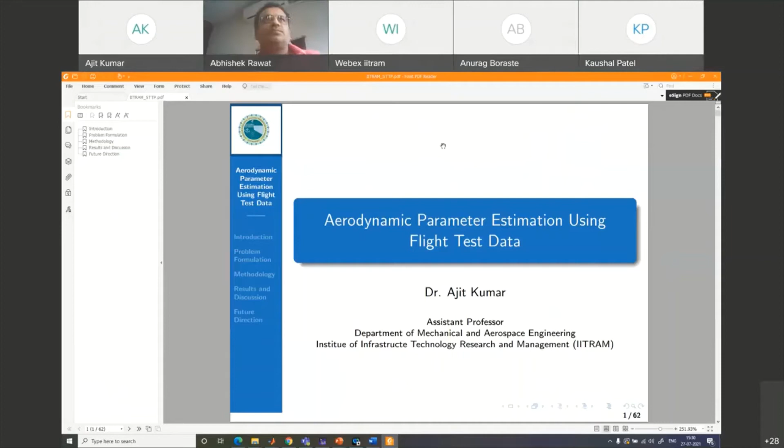Thank you. So the topic for this session's presentation is aerodynamic parameter estimation using flight test data. In this presentation, I would be talking about the introduction part, what this problem is about, what is aerodynamic parameter estimation using flight test data. Then we will also talk about problem formulation, and once we formulate the problem, I'll discuss the methods to solve this problem of parameter estimation. Then we will discuss the results followed by future directions of this work.

Before I start the work, I would like to introduce the term estimation here, parameter estimation. So let us try to understand what parameter estimation is about and where it fits in system theory. We all know in system theory we have three different components, well known as control system, simulation, and identification. These three concepts deal with three entities, which you can see on the screen: input, output, and the system. So whatever we are saying about control, simulation, and identification will be related to these three entities.

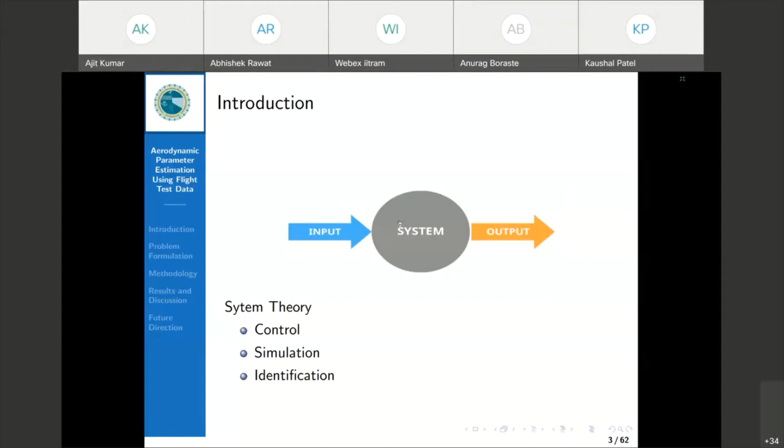The third thing is quite interesting. Sometimes what happens is we know the input data, we also know the output data from the system, but we are not sure about the mathematical behavior of the system, or what the system is about. So when we have these two datasets, input dataset and output dataset, the problem falls under the category of identification. So this was the quick introduction on identification.

Now, parameter estimation. Parameter estimation is a subset of system identification, and as I said, system identification is a determination of mathematical model from observed input and output dataset. In this example, you can see we have an aircraft which is essentially Hansa 3 from the Flight Laboratory, IIT Kanpur. This is just for reference - I have put input data and output data. So input variables contain alpha, which is your angle of attack, pitch rate, normalized pitch rate, and elevator angle. For output, I kept CL and CM, which is your lift coefficient and pitching moment coefficient.

So just to give an interpretation, we have these two datasets, and we want to find the behavior of this aircraft, precisely the behavior of the longitudinal dynamics of the aircraft. This is known as system identification. And when the model is structured in terms of parameters, finding those parameters will be a problem of parameter estimation.

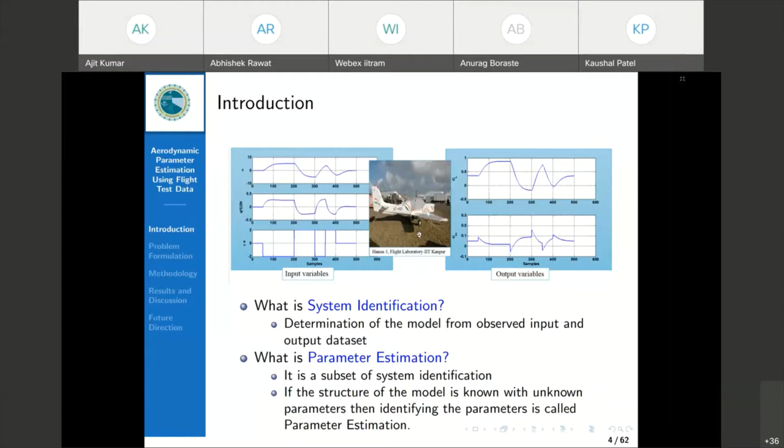Now coming to what is aerodynamic modeling and parameters. As I said in the title, it is about finding aerodynamic parameters. As we know, in a very standard representation of aircraft in 6 degrees of freedom, we have seen terms appearing in the equations like CL, CD, CM. I will also elaborate in subsequent slides. So just to give you the introduction, CL is lift force coefficient, CD is your drag force coefficient, and CM is your pitching moment coefficient.

And in the lateral directional part, we have CL, CY, and CN. They are functions of side slip angle, aileron, rudder, P and R, so they also have the standard meaning. For example, CY is your side force coefficient, rolling moment coefficient, and CN is your yawing moment coefficient. We will see in detail, just to give you the introduction, what we refer to when I say aerodynamic parameters.

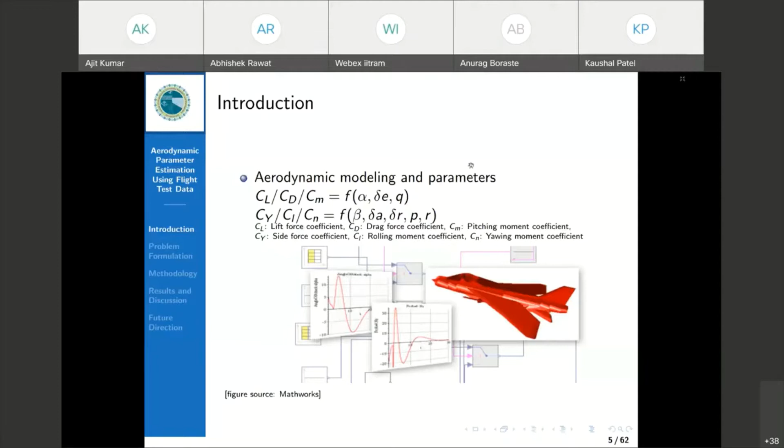Now, after introducing, we also want to know why parameter estimation is required, why we are going for aerodynamic modeling and parameter estimation. These are the motivations of this work: we always have a need and quest for better understanding of aircraft, which can be manned or unmanned, fixed wing, rotor wing, or multi-rotor. Any aerial vehicle can come in this category.

We also know the importance of deriving flight dynamic models, because it helps in investigation of system performance and stability characteristics. It helps in finding high fidelity, high bandwidth models for in-flight simulators. It helps in designing a good flight control system. It also helps in doing analysis on handling quality compliance.

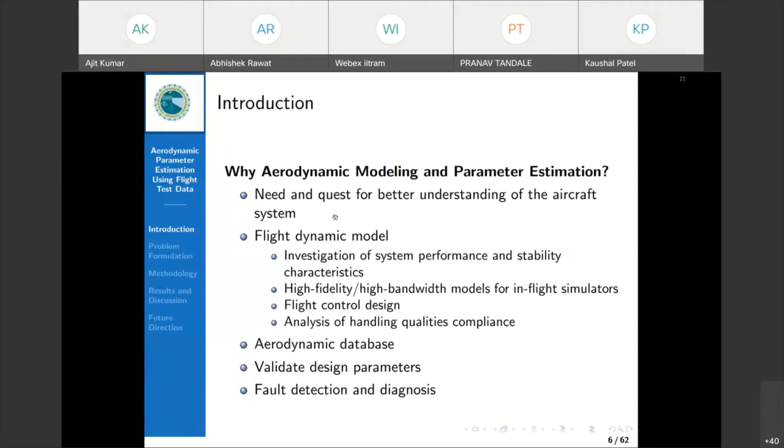Apart from these advantages, we also have an advantage of finding an aerodynamic database with the help of aerodynamic parameters, and we validate design parameters, for example wind tunnel parameters, using these parameters. It's also useful in finding fault and diagnosis, of course. So these are the motivations of doing parameter estimation related work.

Now coming to problem formulation, how exactly we formulate this problem. As I said earlier, we have a standard representation of aircraft dynamics, and generally we assume that the dynamics in two parts are decoupled: longitudinal dynamics and lateral directional dynamics.

So the equations for longitudinal dynamics are here, and the variables appearing on the screen are V, alpha, theta, and Q. V, standard representation, is airspeed, alpha is your angle of attack, theta is your Euler angle or pitch angle, and Q is your pitch rate.

I have highlighted these three terms, as you can see: CD, CL, and CM. They are your force and moment coefficients. For example, CD is your drag force coefficient, CL is your lift force coefficient, and CM is your pitching moment coefficient. I'm sure you will know the physical representation and understanding of these force and moment coefficients.

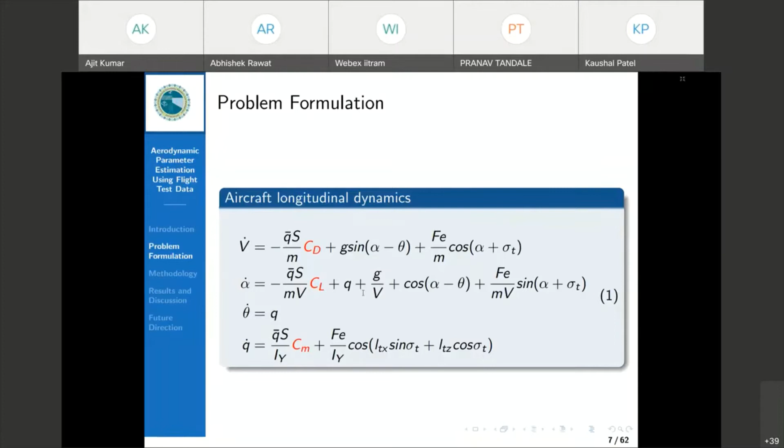And other terms also have the standard representation, so it's written here. For example, Q is your pitch rate, wing area, mass, angle of attack, pitch angle, inclination angle of engines, thrust, dynamic pressure, elevator deflection, wing chord, moment of inertia, and density of air.

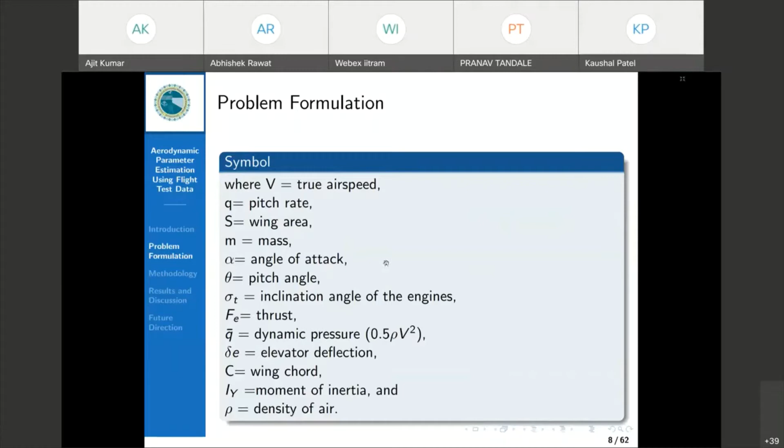Similarly, when showing you these coefficients CD, CL, and CM, we have assumptions that they vary linearly with respect to angle of attack, elevator, and pitch rate. CD, of course, will not have much effect from pitch rate, so this model is simply dependent on alpha and delta E. So this is also a linear representation.

We assume that our flight test data has been gathered in the linear regime. When I say linear regime, it means your alpha should be low, essentially lower than 5 degrees, or it should be in between 2 to 3 degrees. So when the aircraft is flying at a lower angle of attack, this model is still valid. So we are taking here a linear model for CD, CL, and CM.

So now, as you can see, CD equals CD naught plus CD alpha plus CD delta E. And terms in CL: CL naught, CL alpha, CL delta E, and CLQ. And terms in CM: CM naught, CM alpha, CM delta E, and CMQ. They are essentially known as aerodynamic parameters.

These parameters also play a very important role in characterizing the aircraft, as I said, so they have to do with the stability and control analysis of the aircraft. For example, when we have the number CM alpha, we can comment on the stability of the aircraft. When we have the number, let's say CM delta E, we can comment on the controllability of the aircraft.

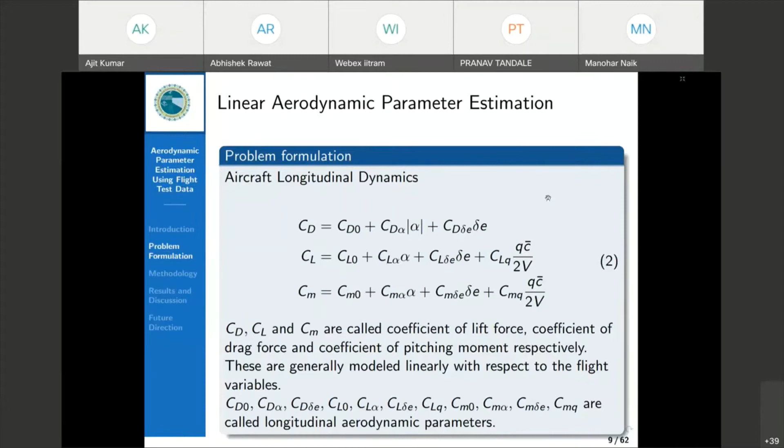So the variable or parameter related to your elevator or control surface helps in characterizing control aspects of the flight vehicle, and other parameters like CL alpha, CD alpha, CM alpha talk about the stability performance of the aircraft. We will learn these things throughout the present slides.

Similarly, as I discussed about longitudinal dynamics, we have lateral and directional dynamics, in which the state variables are beta, which is your side slip angle, P dot and roll rate, where P is essentially roll rate and P dot will be the rate of that, and R is your yaw rate, along with the Euler angles phi and psi.

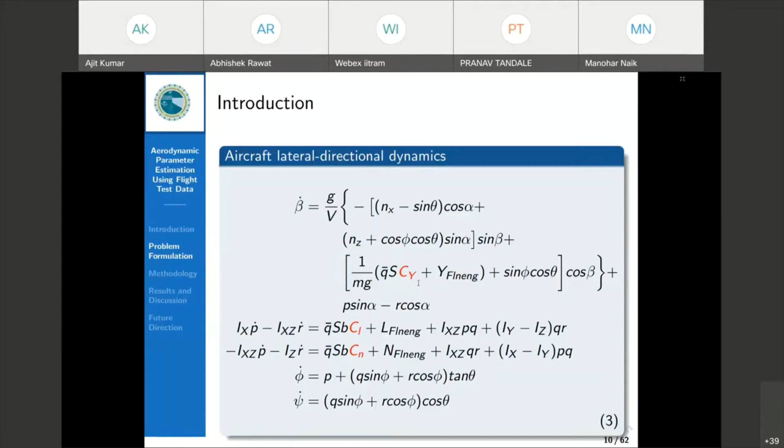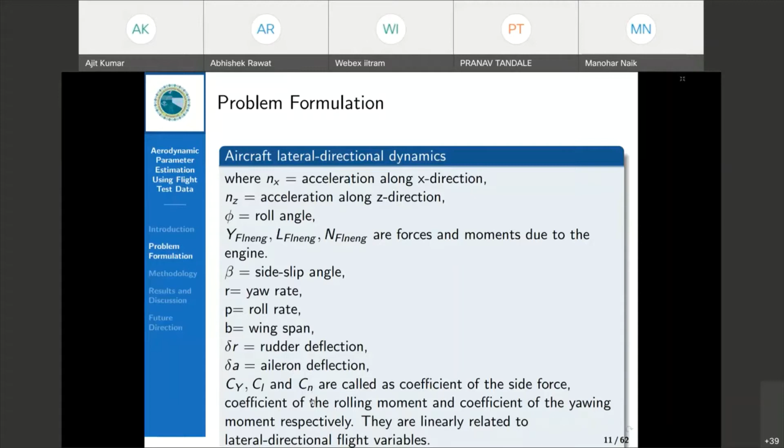Okay, and in these equations also you can see the variables appearing like Cy, Cl, and Cn. They represent lateral directional force and moments. Nx is acceleration along x direction, Nz is acceleration along z direction, phi is your roll angle, and y, f, l, e, g are engine parameters, beta is your side slip angle, r is your yaw rate, p is roll rate, b is wingspan, and delta r, delta a are control surface deflections, rudder and aileron deflection. So Cy, Cl, and Cn are called the side force coefficient, rolling moment coefficient, and yawing moment coefficient.

So again, we assume that the relationship between force and moment parameters are linear with respect to flight variables like beta, r, p, delta r, and delta a. That's why we got again a linear equation. So now the problem for lateral directional dynamics could be finding these parameters: Cy naught, Cy beta, Cy r, Cy p, Cy delta r, Cy delta a, etc. Similarly for Cl and Cn.

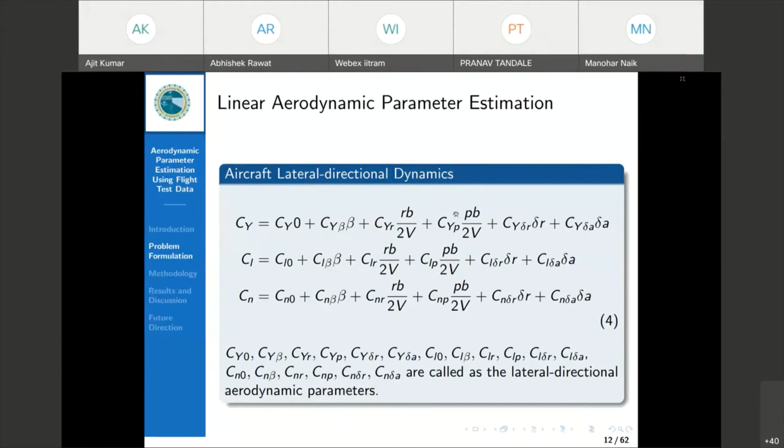So I hope now we are clear with the problem formulation part. Now immediately these questions will come to mind: when we have described the problem, and we know the problem formulation of the system, then how to solve them, how to find these aerodynamic parameters. So we have different approaches to solve this problem.

First one is the analytical method. Under this method, when we have the details about the aircraft, meaning we know the geometry of the aircraft, then we can get a first cut idea on aerodynamic parameters. So this is one of the simplest and required methods to do this analysis.

And the second one is the wind tunnel test method, which is also quite popular. In this, usually we scale down the aircraft, whatever aircraft it is. Suppose it's an unmanned aerial vehicle of small size, then we can put a full scale model. And after inserting it inside the wind tunnel, we can derive the aerodynamic parameters. So this is the second approach by which we can get aerodynamic parameters using wind tunnel testing.

And the third one is flight test data. In this method, we have to fly the craft or the UAV if we have one, and then we have to gather the data, and then we can do parameter estimation.

So why these three different methods? Because as we know, the analytical method is one of the simplest, but it has a lot of constraints since we have many assumptions in finding the parameters. So it's not very well suited when we go for design of control systems and simulators, but it gives you the first cut idea on the aerodynamic parameters. It will not be very accurate because of its constraints.

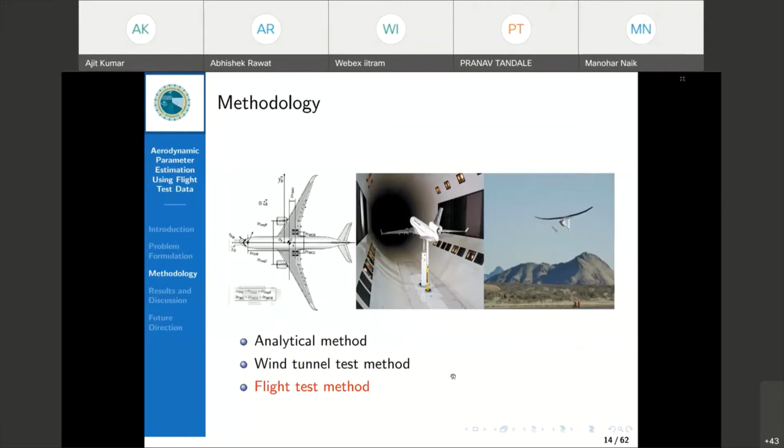Okay, now after choosing this, what are the methods actually to follow? In the last 6 to 7 decades, we have an enormous amount of work in this direction. We have lots of methods in frequency domain, time domain, traditional approaches, and also novel methods like machine learning based parameter estimation and data driven methods.

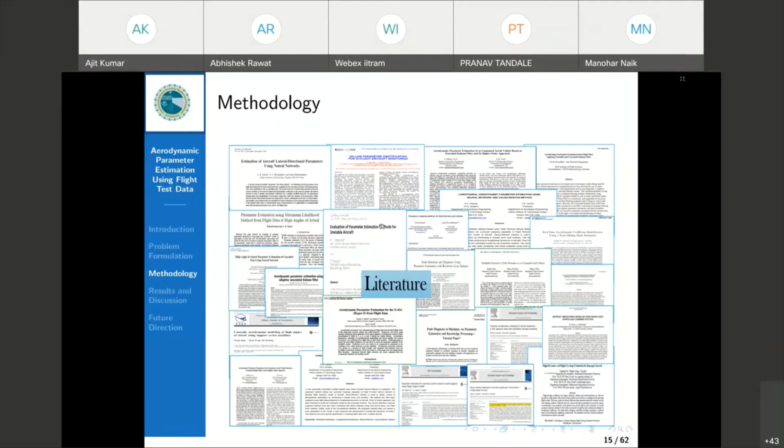So as I said, we have methods in time domain and frequency domain. It's very hard actually to decide which domain to focus on at the initial stage. So I personally give weightage to both domains, as discussed by experts in those fields. The comment by Turkey and Ulsoy in 1998: they say the results show the superiority of frequency domain parameter estimates in the presence of runout noise. However, the frequency domain approach requires an FFT and may be suitable in offline estimation or online estimation of processes with slow dynamics. So this was the comment by Turkey and Ulsoy.

This is Jategaonkar's comment, who exclusively works on time domain. A flight vehicle is a dynamic system, and since a state space representation in the time domain is closer to physical reality than any of the frequency domain transform techniques, time domain methodology is preferred. So this is taking a call for which kind of process we should go for, which method. I would restrict our presentation to time domain for today's discussion.

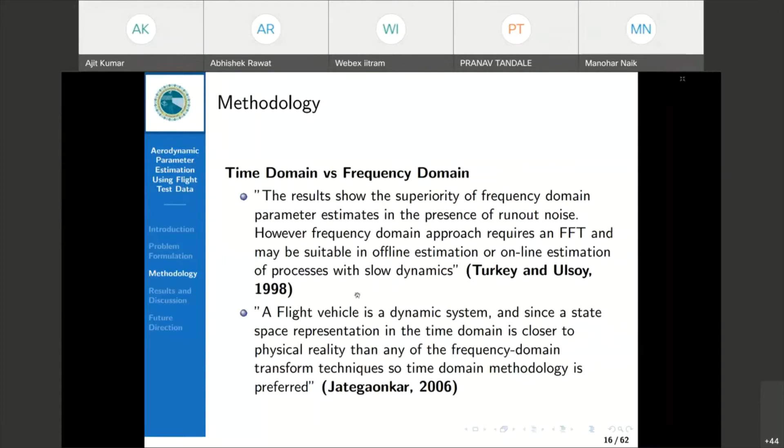In time domain also, as I said earlier, we have methods based on physics-based model and data-driven model. Physics-based model says that the principle derives from basic understanding of the physics. All the parameters associated to this model will have their physical interpretation, and system representation is usually in the form of ordinary differential equation or partial differential equation. So this is your physics-based model approach.

In data-driven model, it's completely a black box kind of approach, that's why it is also known as black box modeling approach. They deal with cause and effect relationship, meaning they only deal with input and output data sets. It's easier to derive, and we do not have the initial requirement of physical understanding of the system. We do not deal with physical equations to work with the data-driven or black box model.

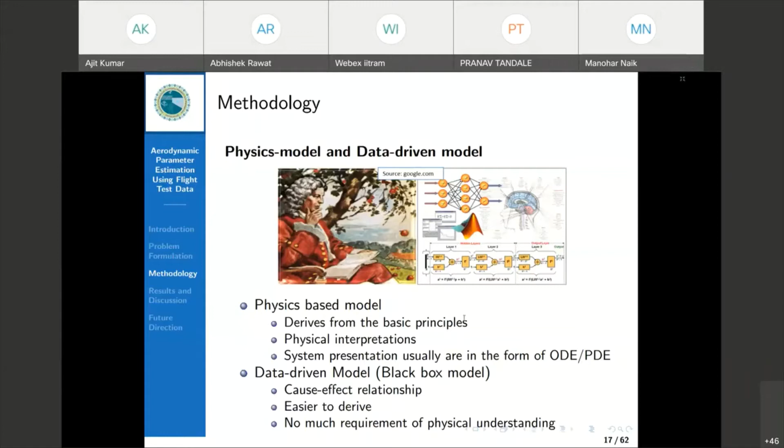Under physics-based model, we have certain standard methods. They are known as equation error method, output error method, and filter error method. We will see them one by one, and then move further.

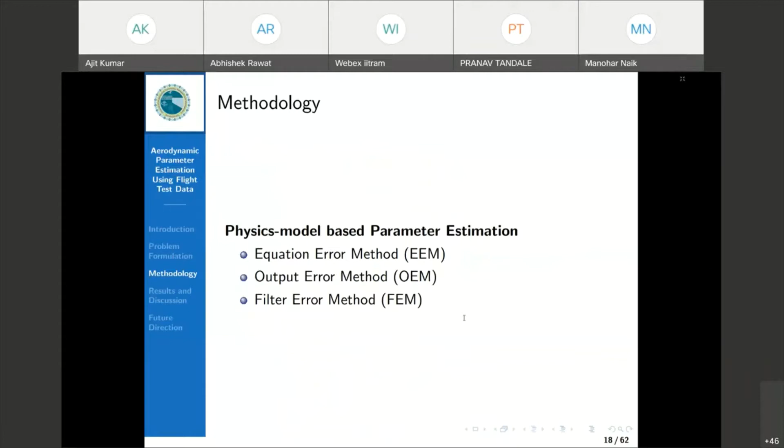Under equation error method, we have a very powerful and preferred approach known as least squares estimation. It is quite a popular approach, I'm sure we are all familiar with it. It is unbiased, efficient, and consistent estimation, and it gives you a one-shot solution. But the drawback is inadequate performance in presence of measurement and process modeling error. When your data is noisy, with noise in measurement and process, it might not perform well.

The second kind of method is output error method, and one example under this category is maximum likelihood estimation based method. It can handle measurement error, and it also deals with optimization schemes, such as Gauss-Newton based optimization, LM optimization, and GA. These are certain optimization routines involved in MLE based estimation. But again, it has inadequate performance in the presence of process noise, meaning it will be able to handle measurement error, but not process noise error.

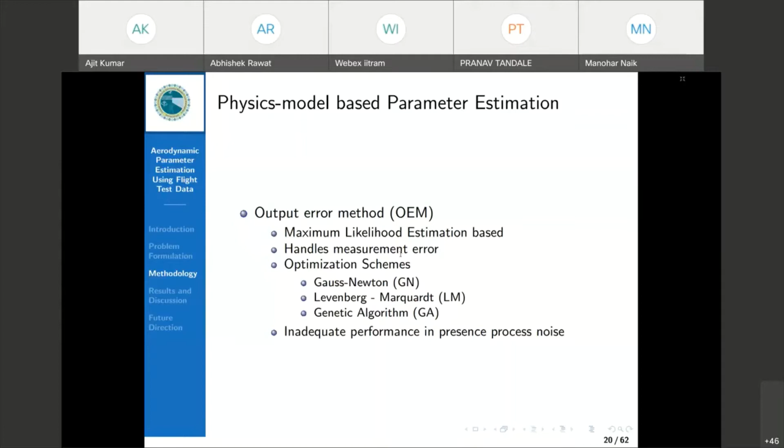The third one under this category is filter error method. It handles both process and measurement noise, and works well with linear and nonlinear models both. It has a relatively faster convergence rate, and is used in unstable aircraft parameter estimation. Under this category, we have quite a popular method based on Kalman filter and its variants, like extended Kalman filter, unscented Kalman filter, and particle filter, etc.

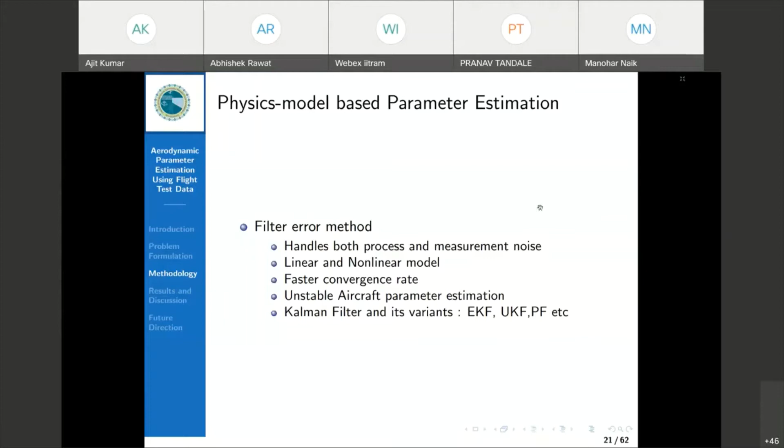These were the methods which fall under the category of physics-based parameter estimation, or physical understanding based parameter estimation method.

Under data-driven model-based parameter estimation, we have three popular methods. Delta method has been one of the most popular methods for the last two decades, but these are not the only methods under this category, because nowadays we have lots of tools under AI and machine learning. So these are the three methods I'll be discussing in this presentation: delta method, and two methods derived from the first one, which are ANFIS-delta and GPR-delta. But apart from these, there are enormous amounts of methods, like fuzzy logic based method, random forest tree based method, and various other types using CNN and deep neural network.

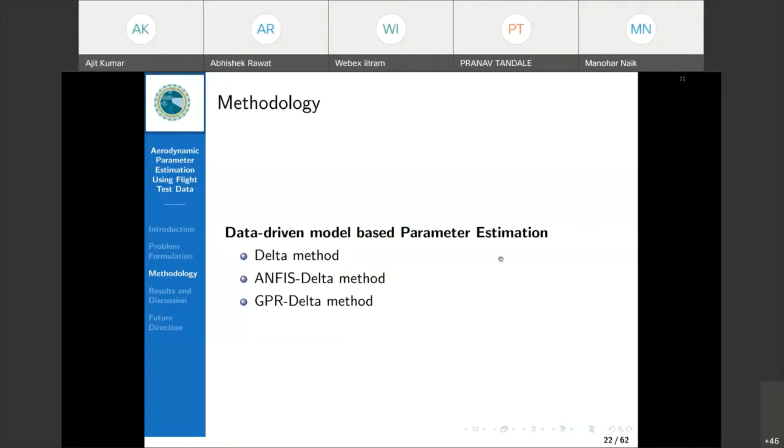Now we will try to see one by one. Throughout this presentation, I'll be talking about these three methods: delta method, ANFIS-delta method, and GPR-delta method. So let's start with the delta method.

The delta method was proposed way back in 1998 by Professor Ghosh, and his supervisor at that time, Professor J.R. Raol, who was also one of the renowned researchers in the domain of aerospace engineering.

The philosophy of delta method deals with the understanding of feed-forward neural network, I'm sure we are familiar with this concept. As you can see in this slide, I have kept the architecture of FFNN, feed-forward neural network, at the corner, which I'm claiming here as a black box model. Under that FFNN, we have three different layers: input layers, hidden layers, and output layers. Our input data deals with input layers, output data deals with output layers.

The heart of this concept is the hidden layer, where we try to capture the complexity of the problem. Based on the complexity of the problem, we choose the number of hidden layers. So judiciously, we can plan for hidden layers and the number of neurons in the hidden layer, and this is the actual concept here, FFNN. Once you have this network model, and you're able to train it on the basis of input and output data, you will get your black box model. This is quite a straightforward process of getting a trained model using FFNN.

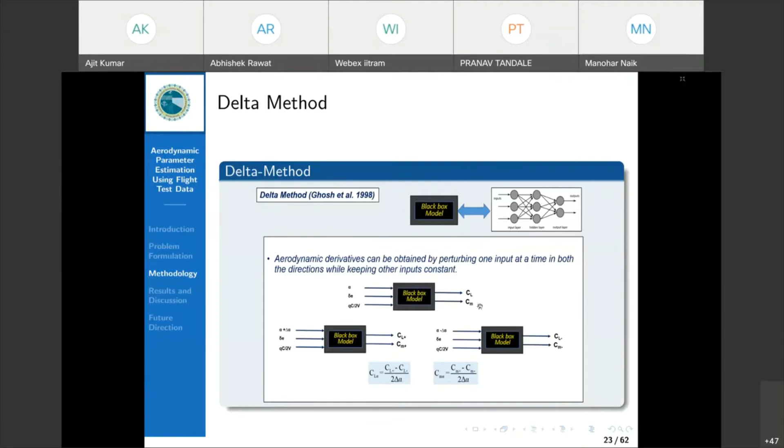But before we see the result, I would also like to discuss two novel methods recently proposed by me and my professor and PhD supervisor, Professor Ajay Kanti Ghosh.

In this approach, we tried to replace the feed-forward neural network with ANFIS, because in ANN, we know it is very good for training but it lacks logic. Fuzzy logic is known for deriving logic from the system, and neural network is good for training the system. So we thought, if we combine both principles, which is a well-known tool nowadays known as neurofuzzy.

We have taken the advantage of neurofuzzy and put it into the delta system or delta philosophy. So ANFIS delta system is essentially a combination of neural network and fuzzy logic understanding, and your feed-forward neural network, which was a 3-layer network, is now getting replaced with a 5-layer ANFIS architecture.

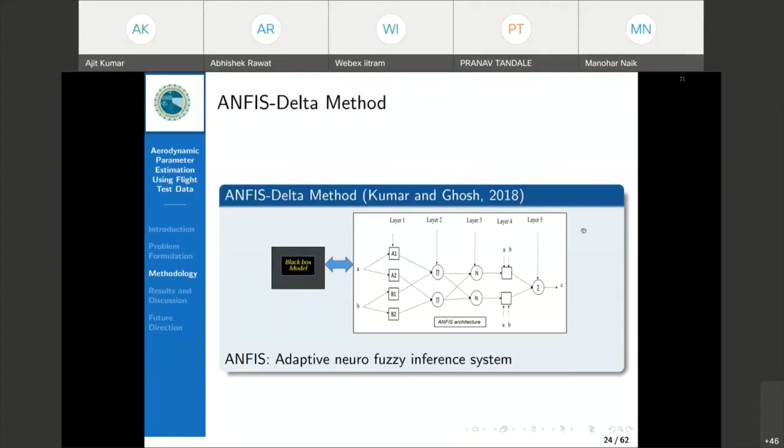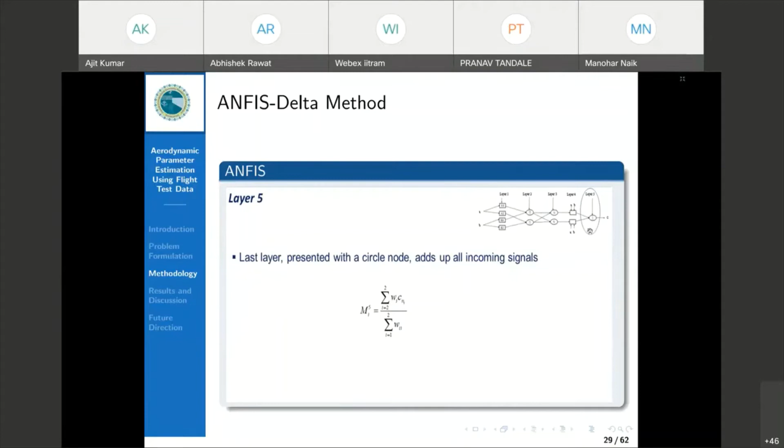Earlier you have seen input layer, output layer, and hidden layer. Here also we have 5 different layers: layer 1, layer 2, layer 3, layer 4, layer 5. Whatever we were trying to do with curve fitting with the help of activation function, now your membership function will get active in this approach. This was the philosophy of ANFIS delta, and another one was the GPR delta method.

So in this approach, we tried to replace the concept of ANN network with GPR understanding, which is your Gaussian process regression model. This works in a stochastic framework, and we do not have to deal with layers.

We will also see some features of Gaussian process regression. It's known as a powerful non-parametric tool for learning regression, coming from supervised learning based on input-output data sets. It's a Bayesian-based approach with a Gaussian probabilistic framework. GPR accommodates asynchronous data sources, periodic data, missing data, and structural data. These are additional advantages of dealing with GPR.

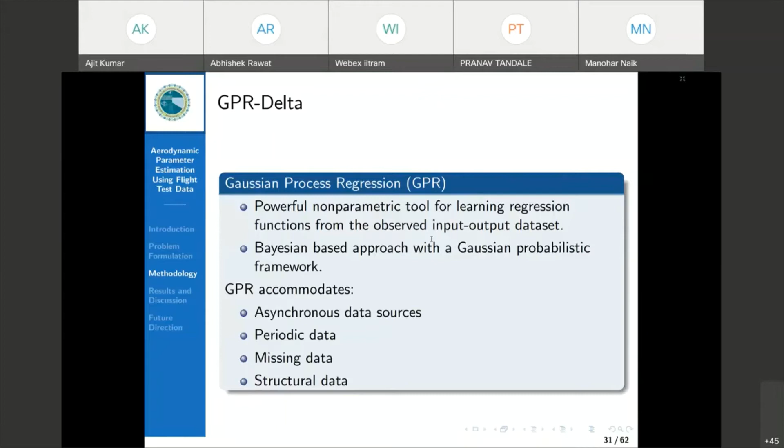Like ANN and ANFIS, we have features by which you try to approximate the nonlinearity or capture the dynamics of the problem. They are covariance or kernel function, which gives a model of data and controls the property of the Gaussian process. Other adjustable parameters are known as hyperparameters. By adjusting these parameters, you are also trying to adjust the performance of the system. So under these two, covariance function and hyperparameters, you will be able to approximate the function.

GPR model can model various different traits and properties of a data set, and simple covariance functions can be combined to create a more complex one. You can also take a multiple combination of covariance functions to derive a GPR function. So this was the understanding of GPR.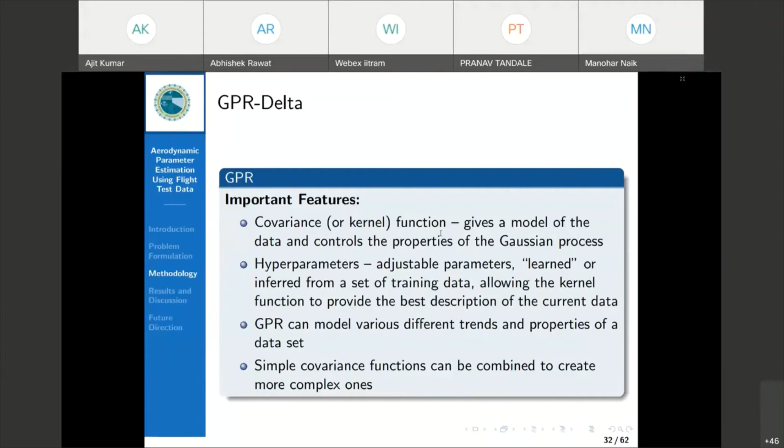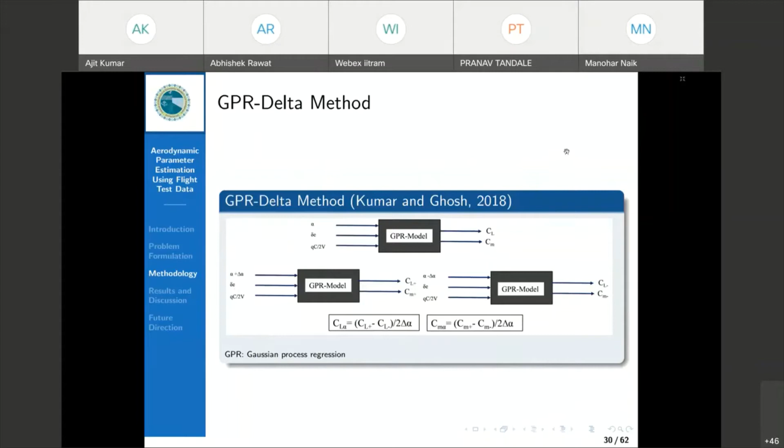Under this understanding, we will apply the philosophy of the delta method. As I said, if your black box is now the GPR model, then you perturb the system in both directions and you will get CL alpha, CM alpha, similarly CM delta E and CL delta E, etc. So after knowing the system, we will discuss the case studies. Now it's time to look at the implementation of these methods which we have discussed.

To demonstrate these three methods, we have taken three case studies of two different aircrafts. The first one is Hansa 3, which is an in-house aircraft at IIT Kanpur flight laboratory. We have demonstrated lateral directional aerodynamic parameter estimation from simulated noise data.

This is just simulated data and we have added noise purposefully. We will see how the aerodynamic performance or parameters come out when we use this data. Second, to demonstrate longitudinal dynamics, we have estimated the longitudinal parameters from Hansa 3 flight test data. Then the third data is independent data taken from DLR.

Reference goes to Dr. Jategaonkar. Under this, we also performed longitudinal parameter estimation just to validate our method with another aircraft.

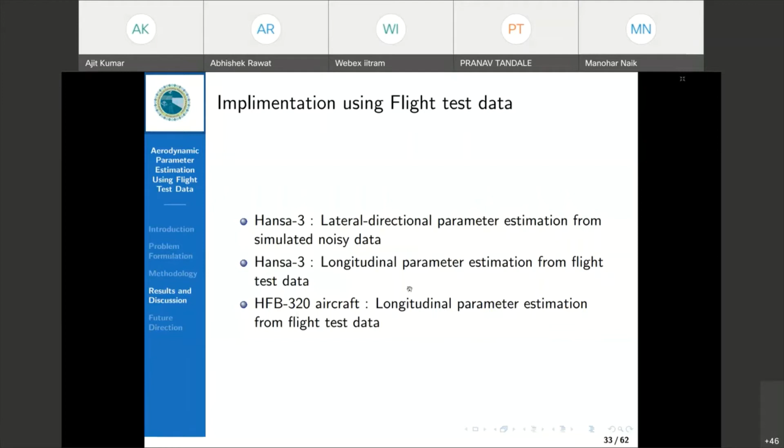These are the technical specifications of the Hansa 3 aircraft. Length is 7.66 meters, wingspan is 10.47 meters, wing area is 12.47 square meters, and it has a maximum takeoff weight of 750 kilograms. Cruise speed is around 213 km per hour, and it has a range of 842 km.

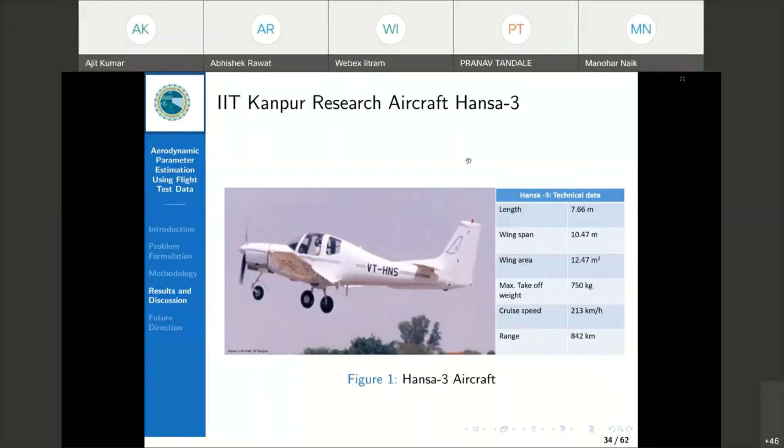To estimate lateral directional parameters, we need to have the flight variables under lateral directional dynamics. We know that under lateral directional dynamics, we have inputs as side slip angle, roll rate P, yaw rate R, aileron deflection delta A, rudder deflection delta R. We also tabbed in force and moment coefficients: side force CY, CL is your rolling moment coefficient, and CN is your yawing moment coefficient.

You can see the data sample is of 45 seconds, essentially a replicate of one data set. In the first segment, we added 1% noise from 0 to 15 seconds. From 15 to 30 seconds, we added 5% noise. And from 30 to 45 seconds, we added 7% random noise. We wanted a bigger data set, and purposefully added noise of different degrees just to see how they respond.

After this training, I'm showing you only the ANFIS estimated results. Similarly, we also had results for ANN and GPR. So for example, let's talk about CY. We have trained our FIS fuzzy inference system using 1%, 5%, and 7% random noise.

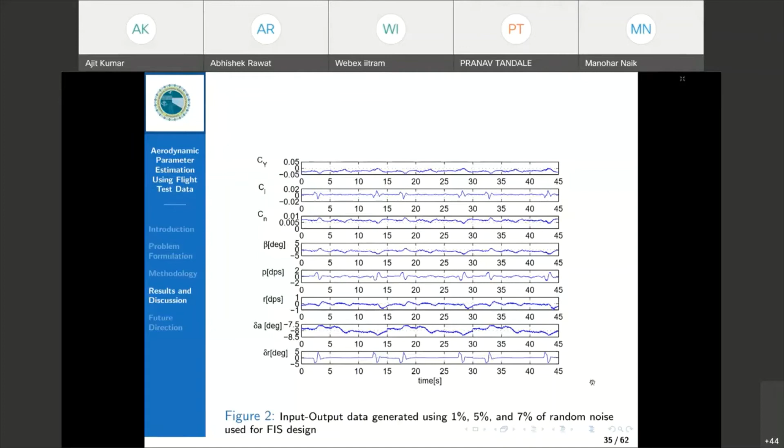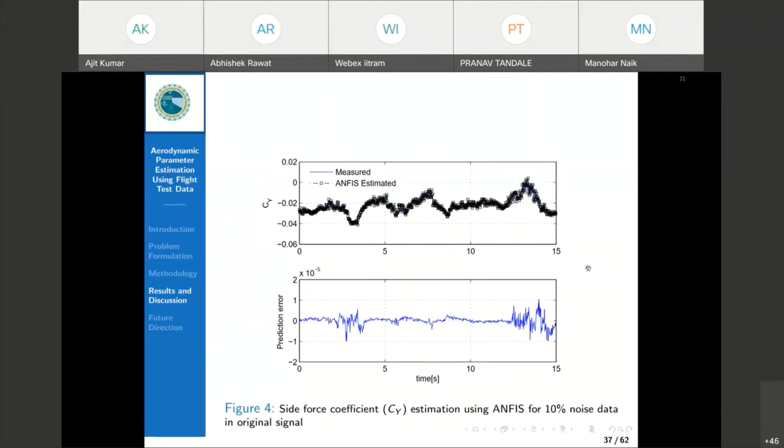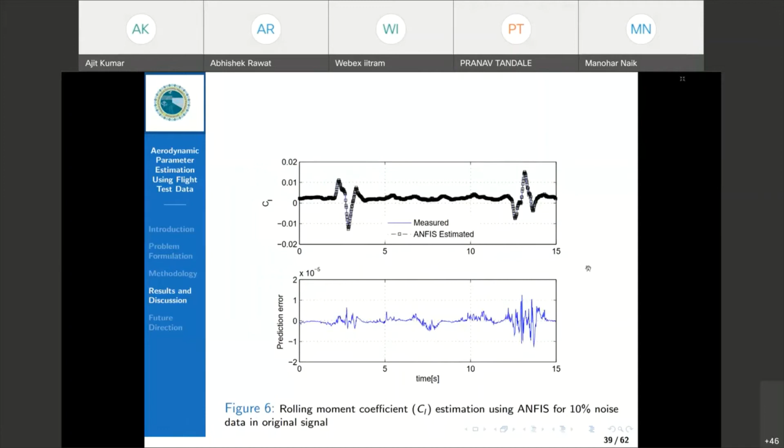Similarly, this exercise was done for rolling moment coefficient CL, and we saw our prediction error in the order of 10 to the power minus 5. This earlier one was for 3%, this is for 10%. And then for yawing moment, prediction error again in the range of 10 to the power minus 6, using 3% noise data and 10% of the noise data.

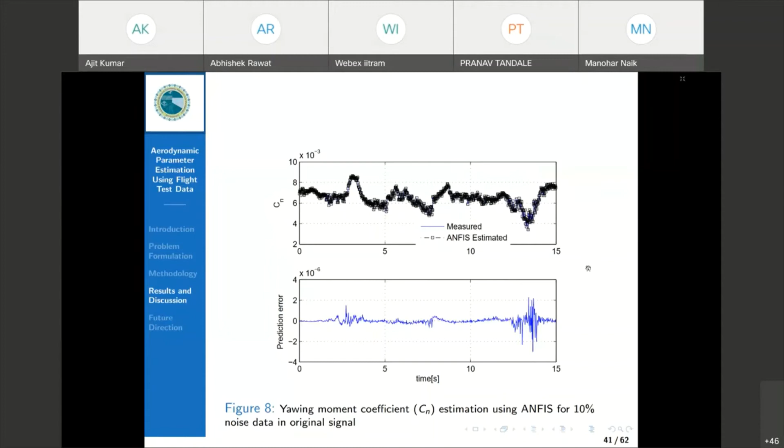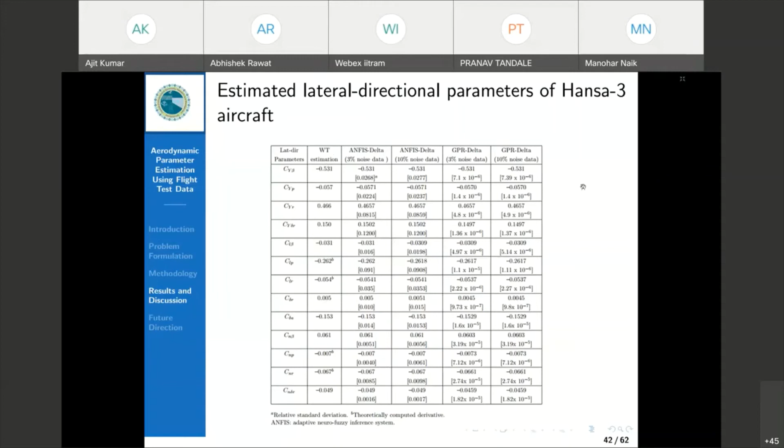Another exercise we did on the real test data. Earlier I was talking about simulated data. Now we'll be talking about real flight test data, which was again performed on Hansa 3 flight test data. But this time we will be demonstrating longitudinal parameter estimation, or longitudinal dynamics of the aircraft.

Under longitudinal dynamics, we have flight variables as alpha, V, and delta E. Just to show you how flight data is gathered on the aircraft, these are the flight variables: alpha, beta, V, phi, theta, psi, and delta E. This is the actual flight test data which was gathered on the Hansa 3 aircraft.

But after getting the data from the flight test, we also need to validate the data, and this process is known as either kinematic consistency check or flight path reconstruction. Sometimes we also call it a data compatibility check. This must be performed when we work with flight test data, just to assure the data, because data-driven modeling is all about your data. If your data are accurate, then there are chances that you will get an accurate model. So we ensure that the flight test data, whichever gathered, are compatible for further processing.

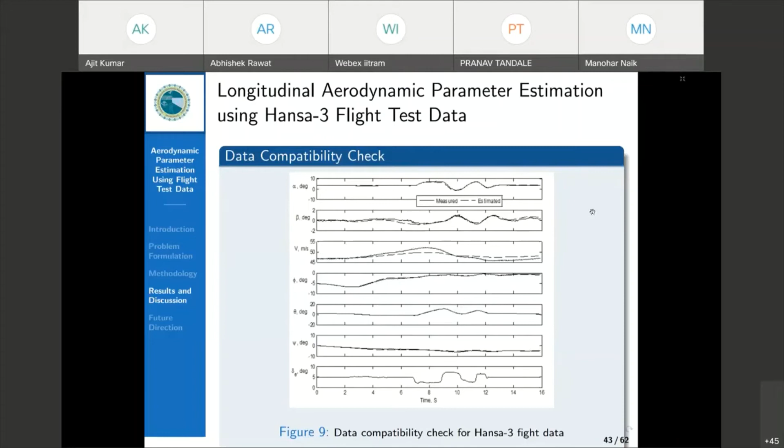So this is an exercise of data compatibility check for Hansa 3 flight data.

Now we also tried a different approach. We have 3 sets of data for this. The first set of data we used for training, as you can see here, tagged as FTD1. FTD1 is used for modeling, essentially training ANN and ANFIS modeling, and then FTD2 we used for validation. So we validated the data using FTD2, second flight test data, and third flight test data, which is FTD3. The first flight test data was used for deriving the model, and these two, FTD2 and 3, were used for validation.

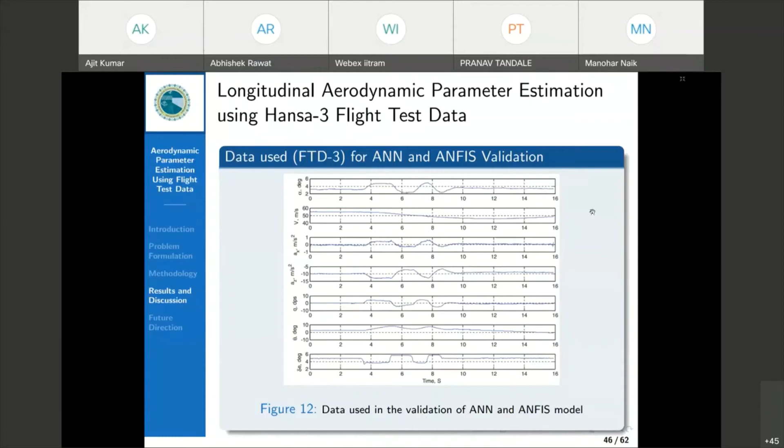Once we have performed this flight path reconstruction or data compatibility check, we have to segregate the data in terms of input and output data. So input data here we have kept as, again, delta E, which is your control surface deflection, elevator deflection, and QC by 2V, which is your normalized pitch rate, and your angle of attack. CM is pitching moment coefficient, CL is your lift force coefficient. So now you can see the first two are your output data set, and these three are your input data set.

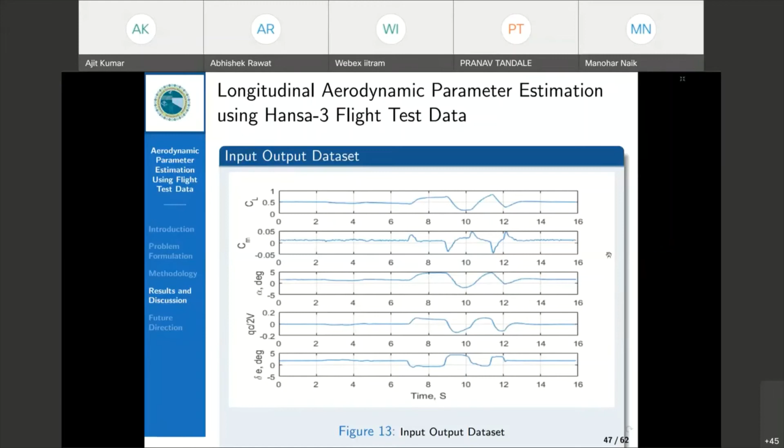Once we have input and output data sets, then we are ready for implementing this new algorithm. But immediately your question should arise: how do you measure these two variables? Because it is quite understandable that in normal flight we have a process of recording this data. Angle of attack can be recorded, Q can be recorded, delta E can be recorded. But how can we measure in flight these two variables? Do we have any sensors which can directly measure CL and CM? If you have such a question in your mind, you will get the answer with this explanation.

Normally what happens is most of the sensors which measure the data are in the body frame, actually the body reference frame. So we have measurement of acceleration in the X direction. We have the thrust data. We also know the thrust inclination angle sigma t. We know the mass or weight of the aircraft.

And we also know about the dynamic pressure, we know the surface area of the aircraft. So when we have these physical variables, either coming from the flight test or from the geometrical detail, then we will be knowing about Cx, right? So we will get Cx and Cz, they are your force and moment coefficient in body frame. And we know CL, CD, they are in your wind frame. So there is a method by which you can transform or convert your body frame force and moments into your wind frame, CL, CD and CM.

So with this, because we know alpha, we now know CZ and CX. So by knowing CX, CZ, and also with respect to alpha, we can get CL and CD. So that is how we get CL, CD, and CM from flight test data.

So of course they are derived from flight variables. Whatever terms appear here, they definitely are coming from either flight test data or geometrical detail of the aircraft. So here also you can see P square, R square. We also have the information on inertia. So everything you will get from the flight test data or geometrical detail of the aircraft.

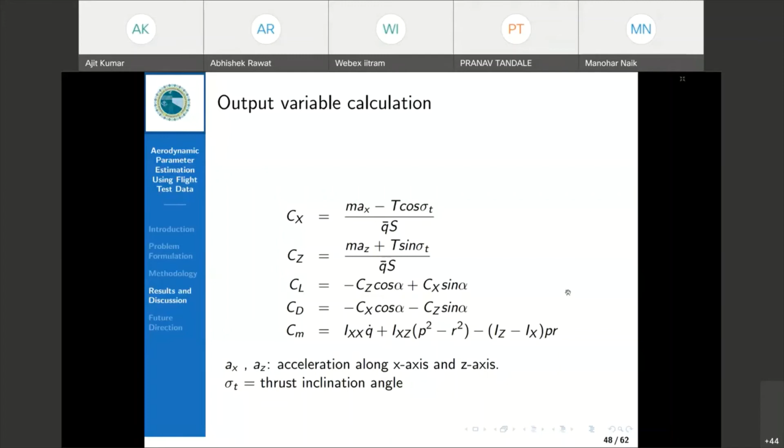The results derived from delta, ANFIS delta and GPR delta are also quite comparable since we are dealing with real-time data. What happens actually is you might not get exactly similar parameters, but they are quite comparable to each other. We also kept LS and MLE for reference.

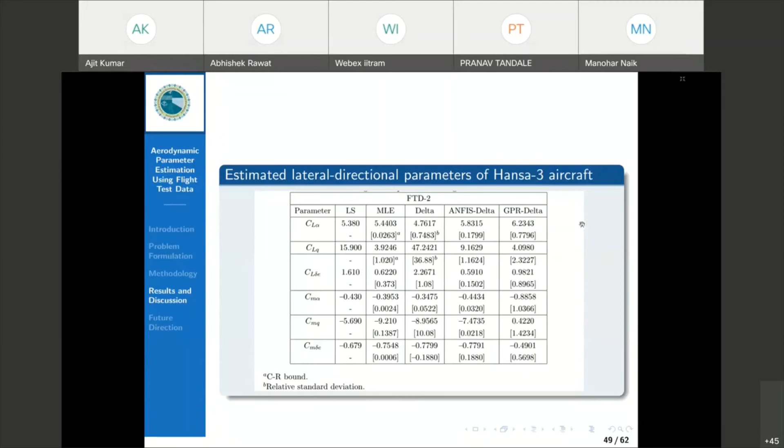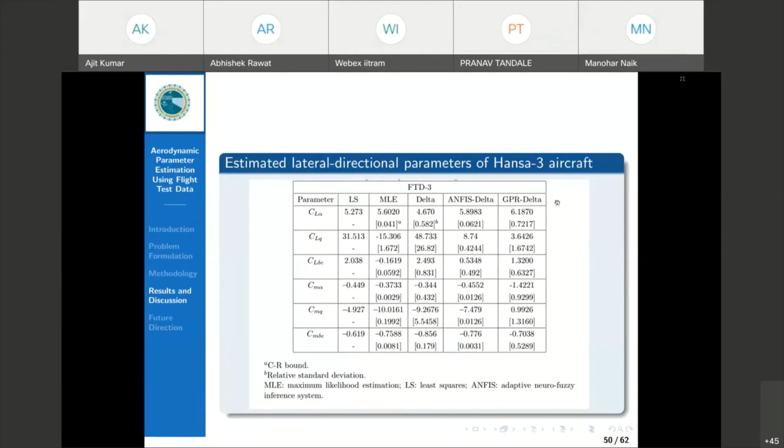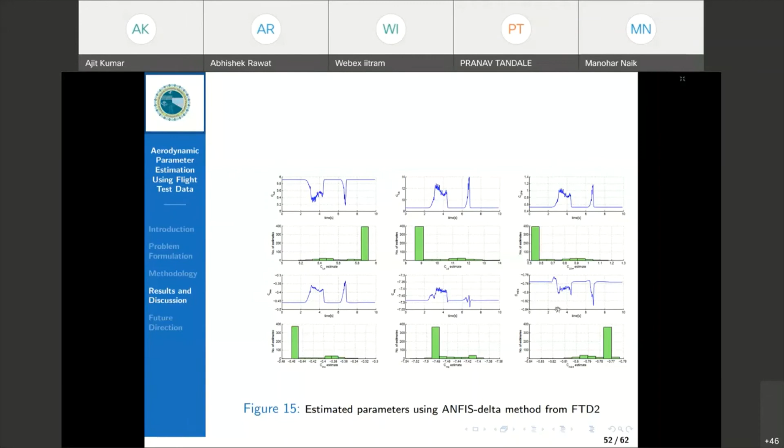Similarly, for all these parameters - CL alpha, CLQ, CL delta E, and also for moment parameters CM alpha, CMQ, and CM delta E - we have a very sharp peak in this category of ANFIS. But we could not get the same thing from GPR delta. Again we are observing the scatterness like the delta method, but of course it is quite comparable with the delta method. So we also kept the results under this category.

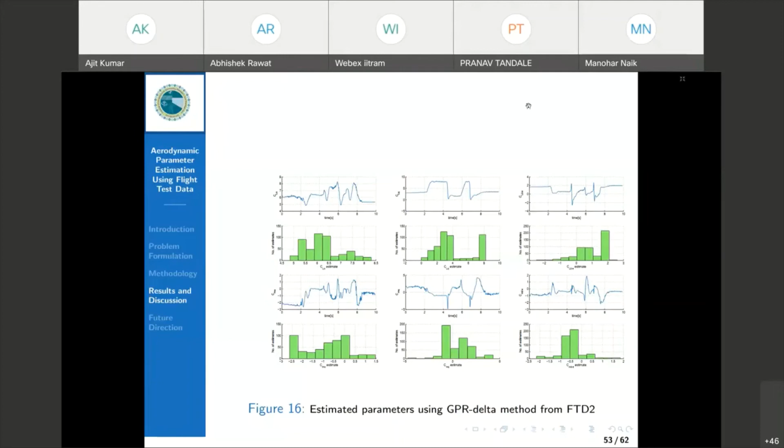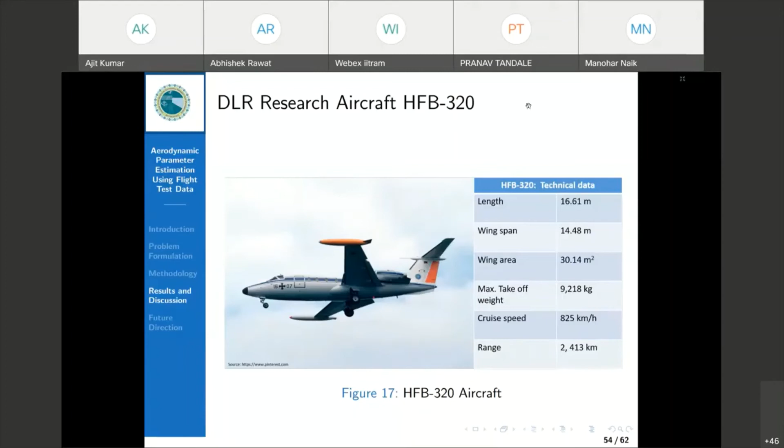After that, we took the data of HFB 320, and these are the technical specifications of this particular aircraft. Length of this aircraft is 16.61 meters. Wingspan is 14.48 meters. Wing area is 30.14 square meters. Maximum takeoff is roughly 9.2 tons. Cruise speed is 825 km per hour. And range is 2,413 km.

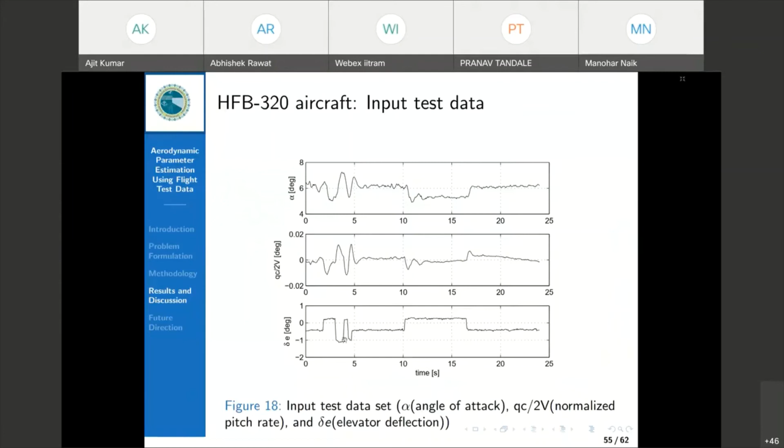With this data, you can see this is again flight test data, and we have segregated it as input output test data. So input data again: angle of attack, normalized pitch rate, and elevator deflection. Now you see that whatever deflection has been performed, your data is also following that. After that, I also included drag coefficient to complete the exercise. So CD is your drag force coefficient, CL is your lift force coefficient, and CM is your pitching moment coefficient. Now we have a set of input data and output data, so we are again ready to implement the algorithm.

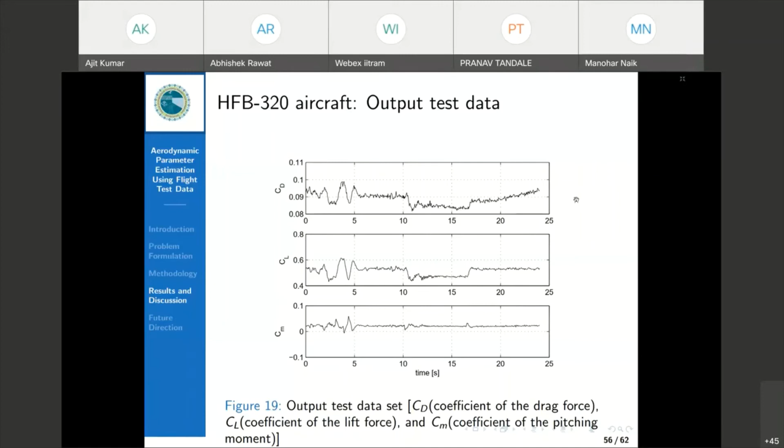So now we have the result from delta method, ANFIS delta and GPR delta method, and we have compared the result of this aircraft with FEM, which is filter error method.

So I'm also trying to make sure that we have discussed the traditional methods: LS (least squares), maximum likelihood estimation based parameter estimation, and also filter error method based parameter estimation. So here is your FEM in the first column, second delta, ANFIS, and GPR.

Generally in this particular literature or research paper, authors have not incorporated or estimated CDQ, CD delta E, CLQ, and CL delta E. That's why they are empty here. But we have compared the variables which we estimated, and also estimated these extra variables just to get the total essence of these parameters.

But of course, we are mostly concerned with the strong parameters like CL alpha, CM alpha, CMQ, and CM delta E, because they really help us in designing a good control system and characterizing the aircraft performance.

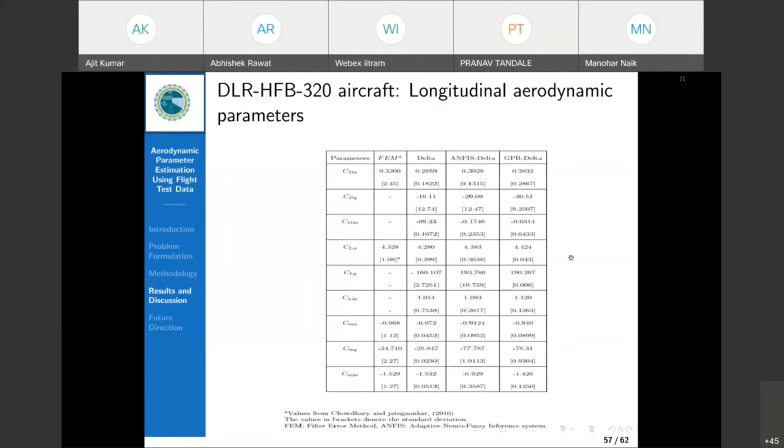So after that, we can conclude that the two novel methods we discussed here, ANFIS delta and GPR delta methods, were proposed and demonstrated efficacy on aerodynamic parameter estimation. Results obtained from these two methods were applied in three different cases: lateral directional parameter estimation from Hansa 3 aircraft, longitudinal aerodynamic parameter estimation from Hansa 3 aircraft, and longitudinal parameter estimation again for HFB 320 aircraft.

And we also compared with the traditional methods like least squares, maximum likelihood estimation, filter error method, wind tunnel extracted parameters, and we found that they were comparable to the previous, older methods.

Results also demonstrate the noise resistant capability, because in the first case we introduced noise of different degrees, and we found that it is still able to give the correct parameters even though we make data noisy purposefully.

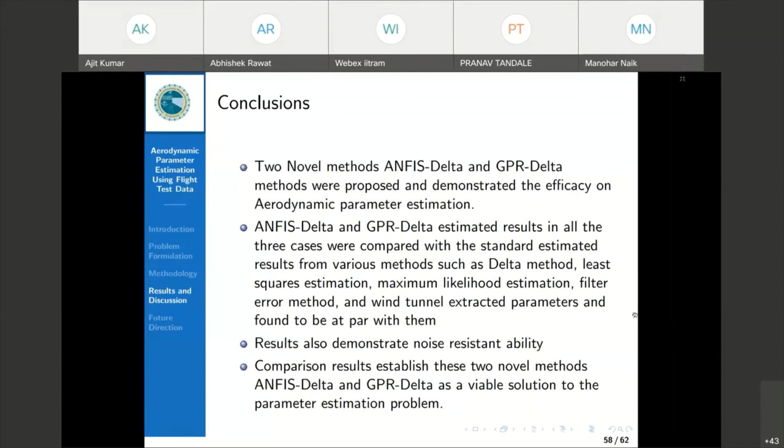So the comparison results established these two novel methods, ANFIS delta and GPR delta, as a viable solution to the parameter estimation problem. Of course, we have so many different methods available these days, and we found that these two can also be an alternative parameter estimation method.

So now, if somebody wants to work on aerodynamic estimation, these could be extensions of the work. When you assume a linear model, or precisely a linear parametric model, I have demonstrated delta method, ANFIS delta, and GPR delta. Of course, you have traditional methods also like LS, MLE and filter error method. And now, in the emerging area of machine learning and AI, you can also think of working with nonlinear parameter estimation or nonlinear modeling of aerodynamic forces and moments.

So generally what happens most of the time is aircraft spends in a linear regime, which is also quite intuitive. But we have a drawback when the aircraft enters a nonlinear regime. This nonlinear regime happens when angle of attack is more than 12, 13, 14, 15 degrees. When it's in the range of 15, 16 degrees, the aircraft becomes unstable, or it will be in the stall regime.

So for that, we don't have a very concretized model-based approach. Data-driven models can also be a candidate solution when the aircraft is entering the nonlinear regime. One exercise that can be performed is on a quasi-steady stall model.

To solve this problem of nonlinear aerodynamic parameter estimation, you can go either for traditional methods like maximum likelihood estimation, or you can look for GPR. You can also look for CART and random forest, bagging and boosting. CART is a classification and regression tree based method. Random forest again has very wide application for nonlinear regression. Bagging and boosting similarly also find their application in this kind of problem.

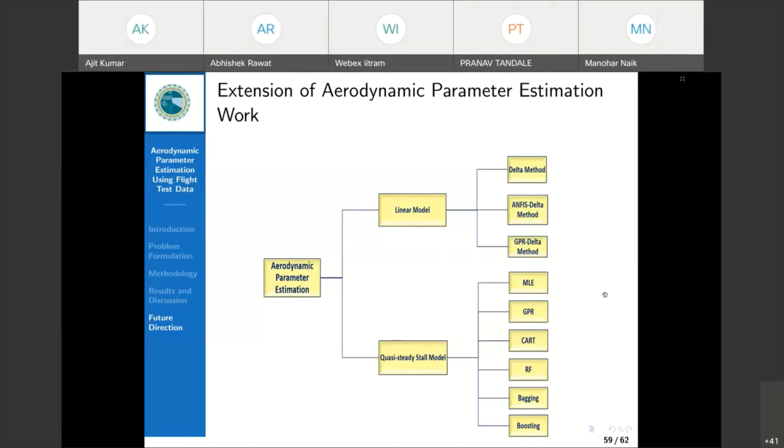So after that, I would like to summarize the presentation, what we have learned in this particular lecture. We were dealing with the problem of aerodynamic parameter estimation using flight test data. I described what this parameter estimation is about. We have seen some introduction to this problem, and we also discussed the motivation part, why aerodynamic parameter estimation is required. And the third part, we solved the problem actually, learning about a few methods for how to solve the problem of aerodynamic parameter estimation.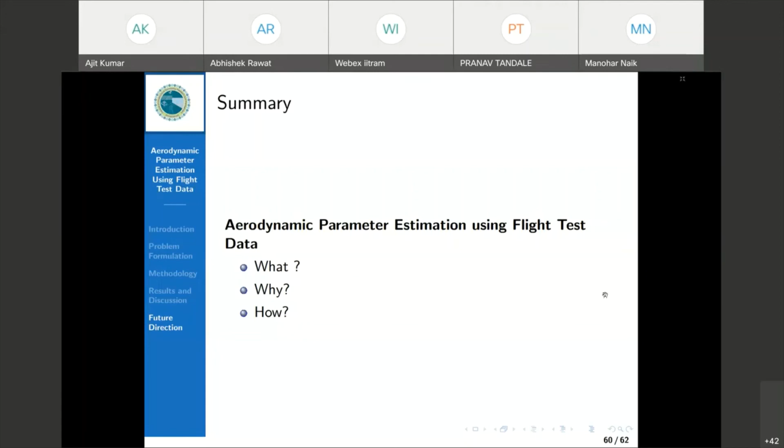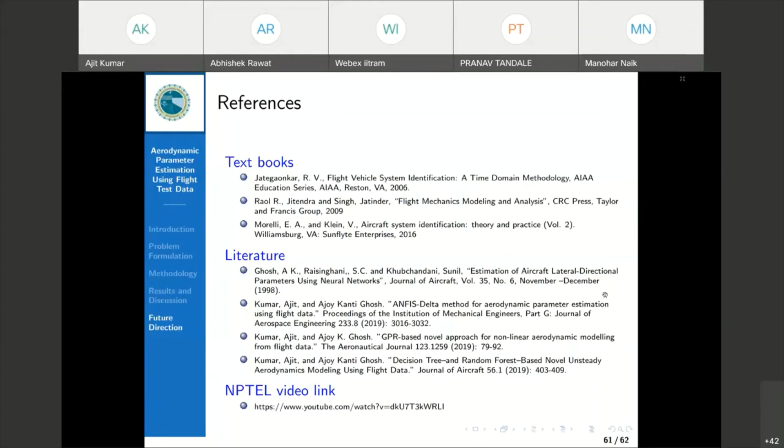So if you want to refer to this work, these are the textbooks: the first one by Jategaonkar, Raol, and Morelli. You can also refer to the literature listed here. And if you want to watch video lectures on this particular topic, the link is given in the slide. So I think with this, I would like to end the presentation.